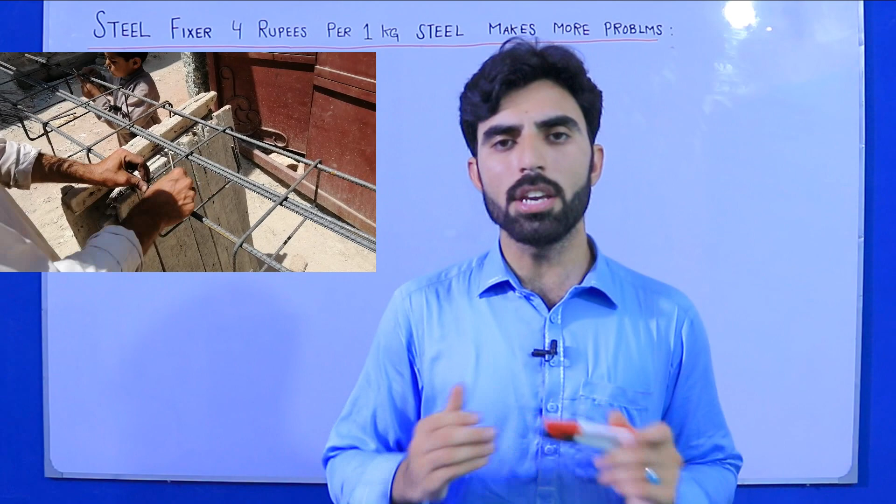I've seen many people, technical or non-technical, even civil engineers working on construction sites, ignore the steel fixer. As you know, steel structure design depends on the steel fixer. If you have a good steel fixer with good experience, he will give you a good result. If you have a bad steel fixer with no experience, he will give you a bad result. So why don't we keep a good and expert steel fixer to give a good result?

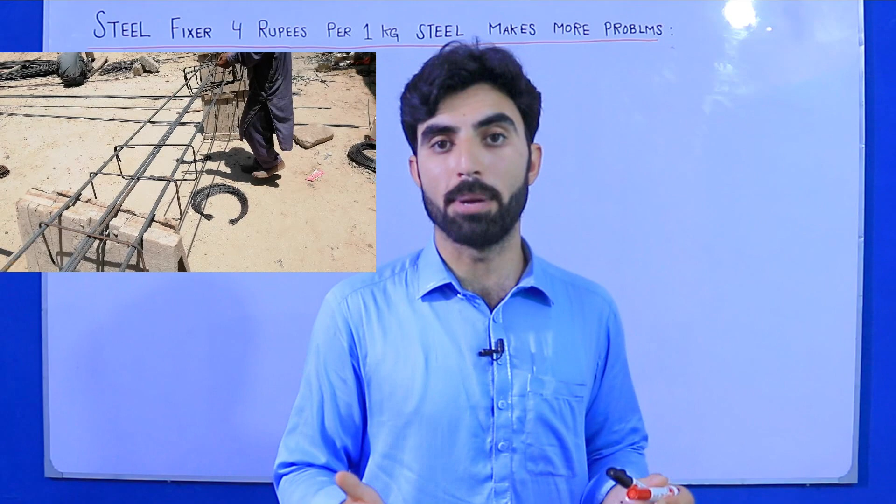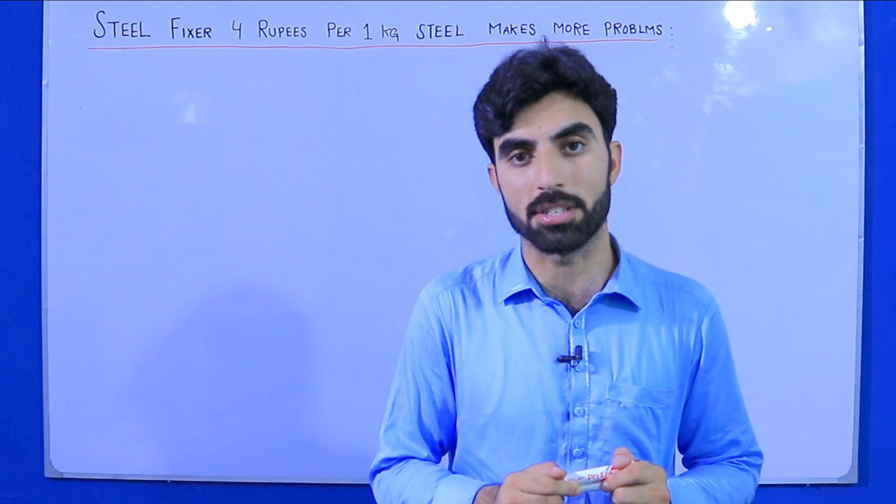Many people want to make a good construction, a good design of house, commercial building, or any department construction work. You should think that steel structure is very important for building construction. If the steel structure is bad, you will face more problems. Even if you have a good architecture design, you will still face problems. Therefore, you should keep a good steel fixer.

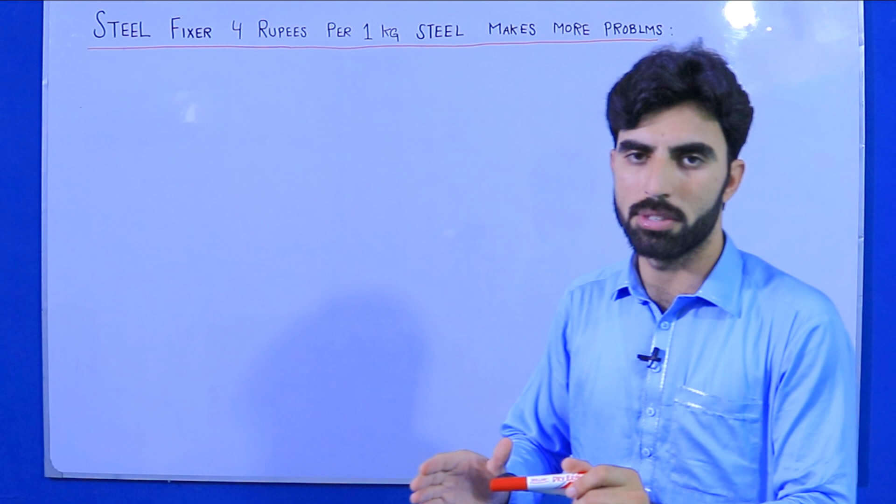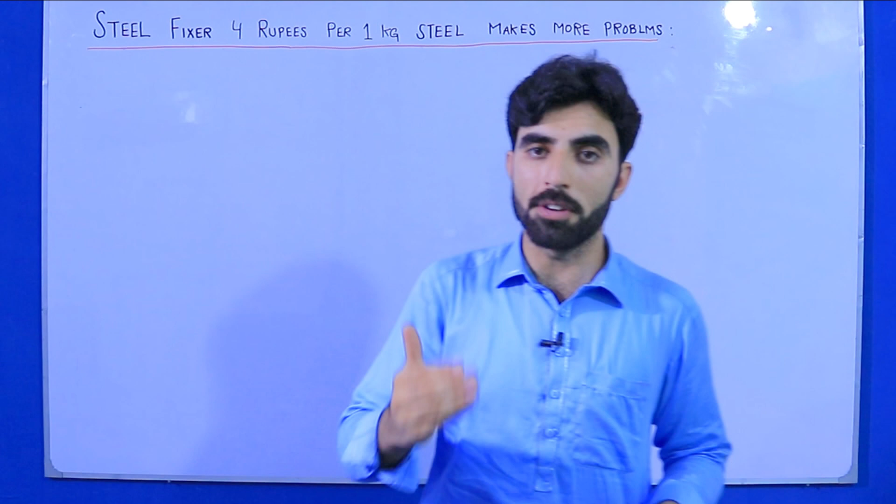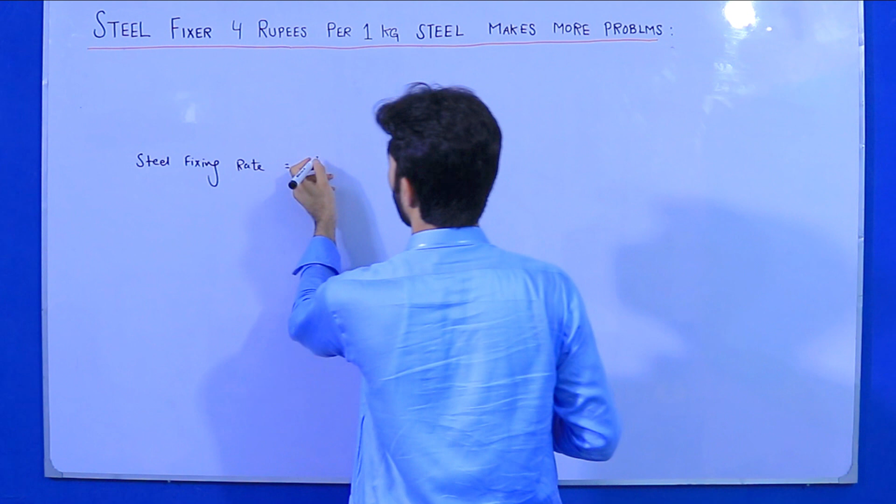Now in my country, in local construction works, not government sectors, the steel fixer rate is 4 rupees per 1 kg of steel. It means the steel fixing rate is 1 kg by 4 rupees.

Remember this point, this is in my country, I don't know about your country or city. This is not the government rate, this is the local steel fixing price, 4 rupees per kg. 1000 kg of steel is 1 ton, so the steel fixing rate per ton is 4000 rupees. This is the steel fixing price for local works in my city.

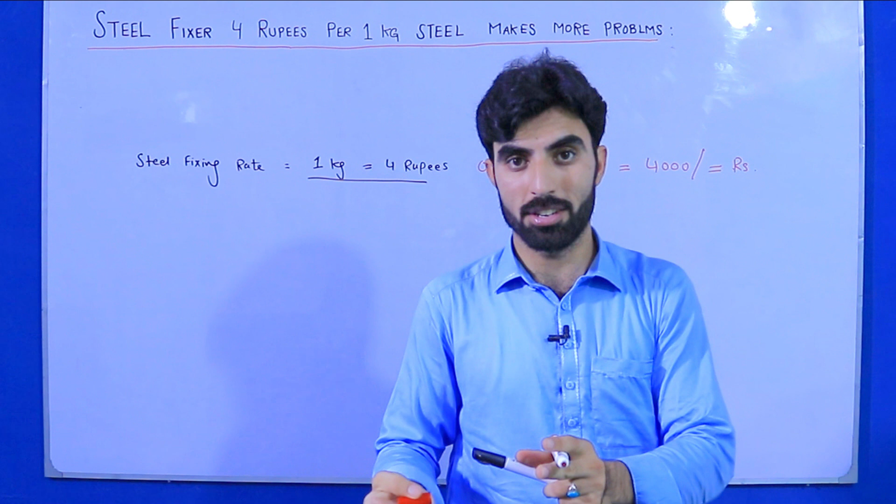So with this 4 rupees, we need the best work, the best steel fixing. Guys, it's impossible. How? Sometimes we can see when we give them the design, the designer asks for hooks at 135 degrees. But the fixer can't give you 135 degrees because he will give you only 90 degrees instead.

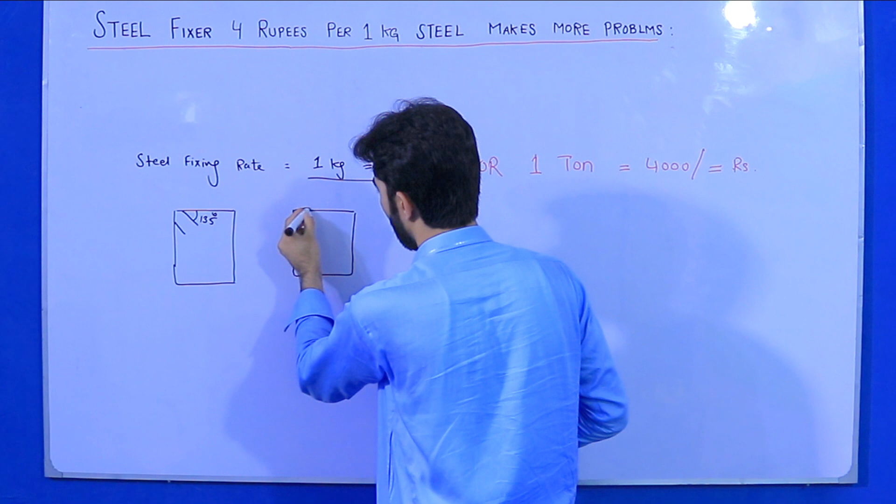But we require and design 135 degrees, and the hook's length should be minimum here or maybe maximum, but we need the hook's length to be not less than 90. So why don't we keep an expert steel fixer with a good price?

So we should give them 5 rupees, because he will give you a good result. Just for 1 rupee, why would you want to destroy the construction? This is wrong, and this is right. He can't give you the correct design at 4 rupees per kg fixing.

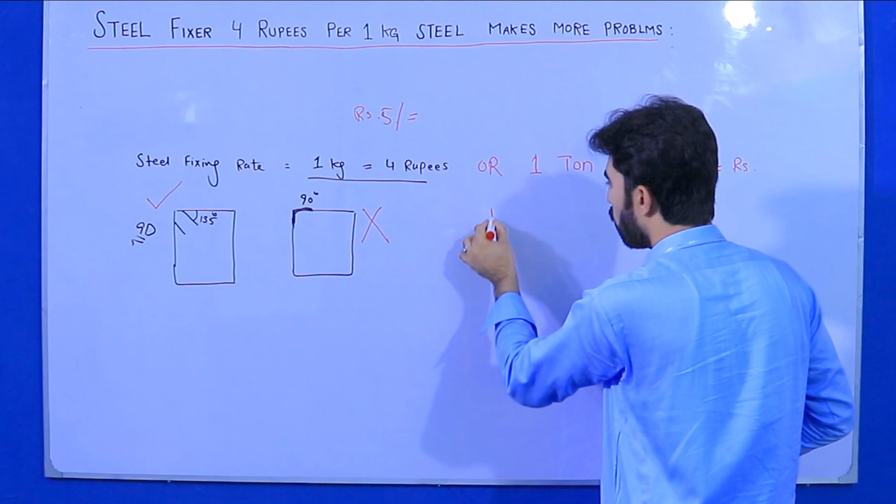Also, we need the hook's length, the dog-leg in columns, like this. They can't give you this properly. Maybe one side will be maximum distance and the other will be minimum.

Also, the lateral tie spacing, they don't keep according to the structural design, because it wastes time. This can waste time. But you just pay 4 rupees.

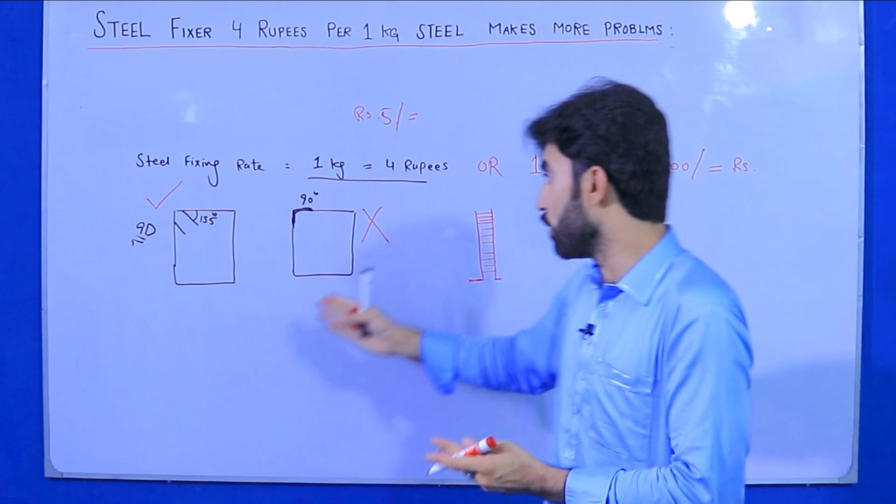When the steel fixer comes to you and wants 4 rupees per kg, tell him: I will give you 5 rupees per kg steel fixing, but do the design according to the steel structure, then you will get a good result. If the structural drawing specifies one thing and he fixes something else, what will happen in the future with your building construction? You will face more problems, because the steel structure is very important.

Without the steel structure, you cannot stand the building. You will face problems, and the structure will fail after some time. So therefore, keep in mind these things which I have discussed.

As you know, how can they do the crank bar in slab properly? They cannot do the crank bar because it wastes time. For 1 ton you give them 4000 rupees per ton, that's the fixing rate according to this 1 kg at 4 rupees.

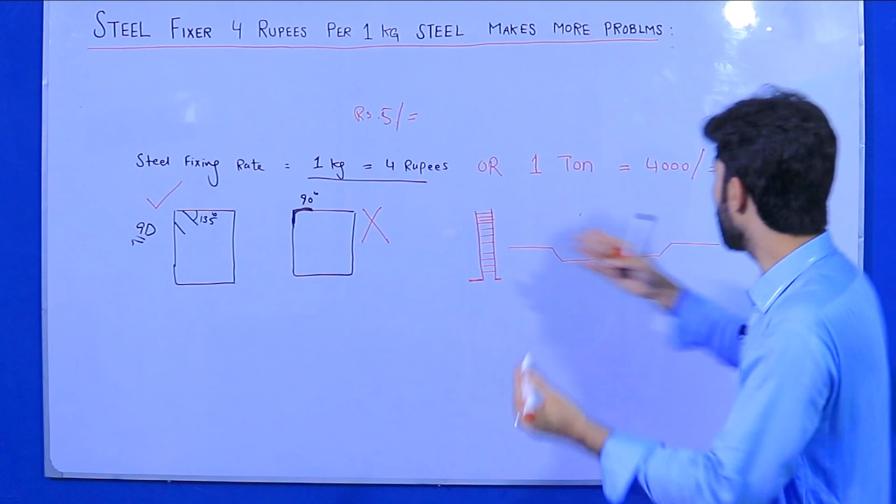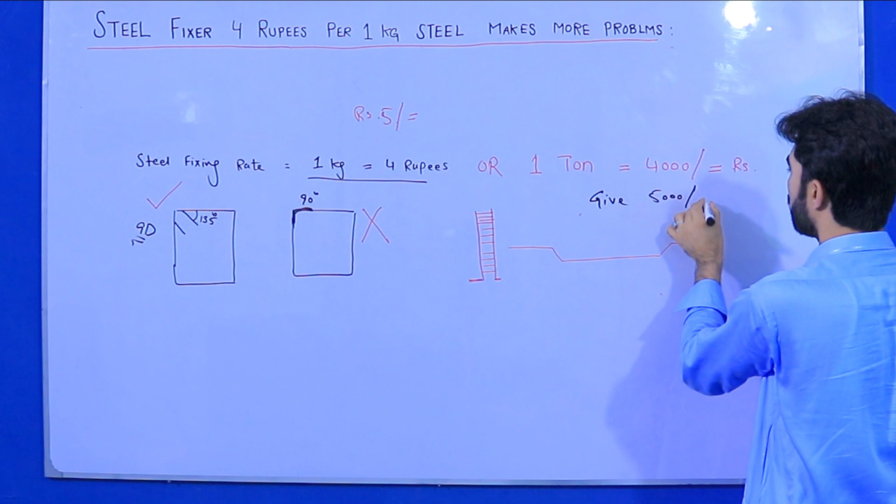So give them 5000 rupees per ton weight of steel, then they will give you a good result like this. You require this, you require this, and you require this, so they will give you the best work.

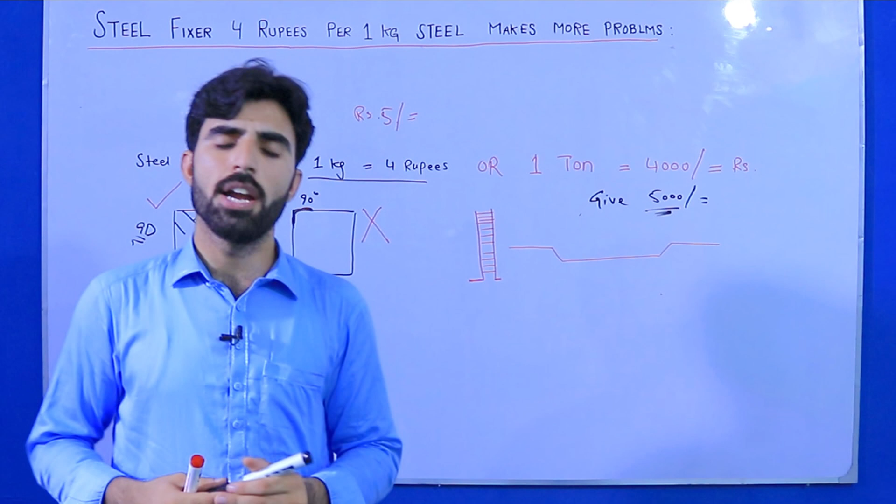Therefore, you should not ignore the steel fixer. Keep them happy, then they will give you a good result. But many people, if the fixer tells you 4 or 5 rupees, you tell them to do it for 3 rupees instead. So how can they do it properly?

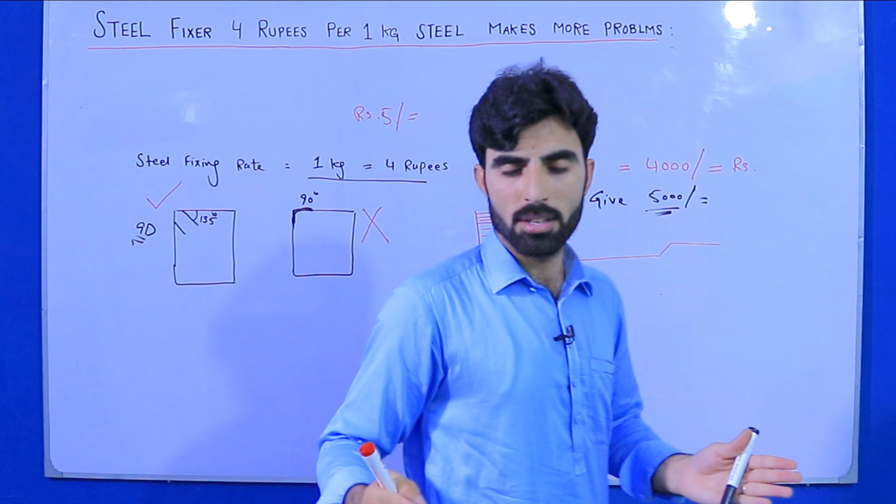I've seen in many projects that they did not bind the steel properly, whether main bars or distribution bars, in columns, beams, or slabs. They don't tie the binding wire properly, because it wastes time, and you only pay 3 or 4 rupees per kg for steel fixing. So how can they afford to support the other labor needed in steel fixing work?

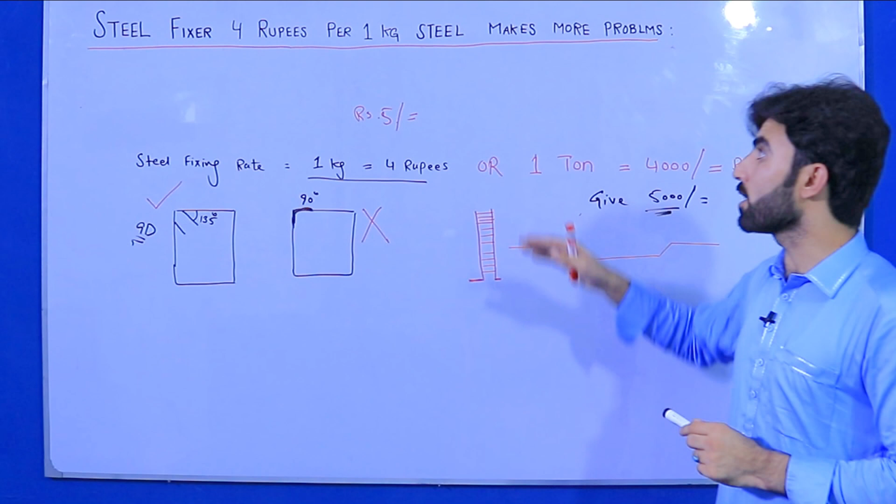So guys, this is a very interesting topic which I have discussed with you: steel fixing at 4 rupees per kg steel makes more problems. This is the topic I have discussed in front of you.